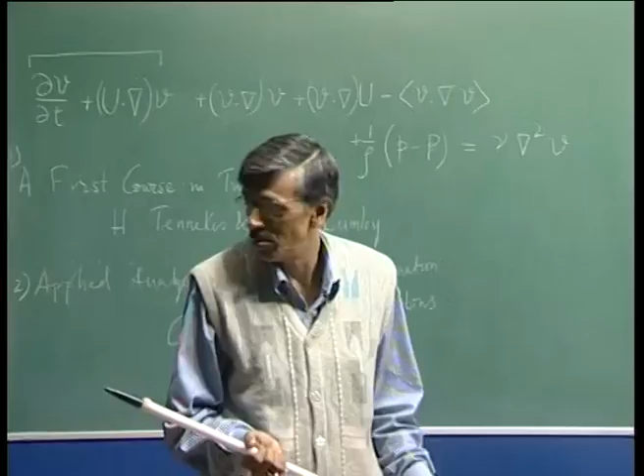So, once again let us review what we had done in the last class, looking at turbulent flows, which is an equilibrium, and what are the time scales involved in turbulent flows. We wanted to estimate by looking at this equation that we called the turbulence energy budget, which actually looks at the energy associated with the fluctuating component of the velocity.

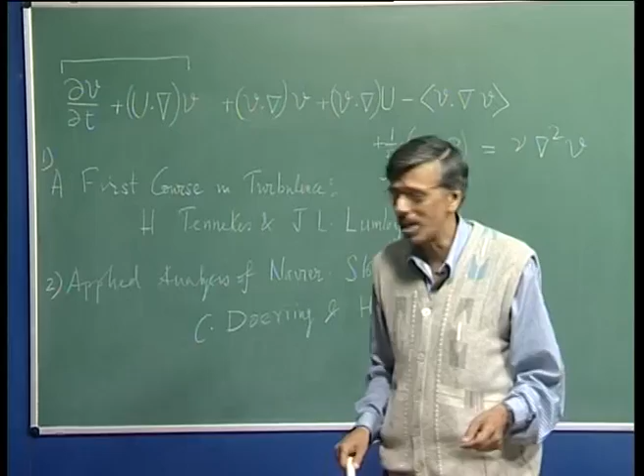What you notice is the assembly of this term that originated from this governing equation for the fluctuating quantity. As you can see, these two taken together, when multiplied by taking a dot product with V, gave us this term. That is what I have identified there. For example, this term comes from the viscous diffusion term here, right? That is what we get.

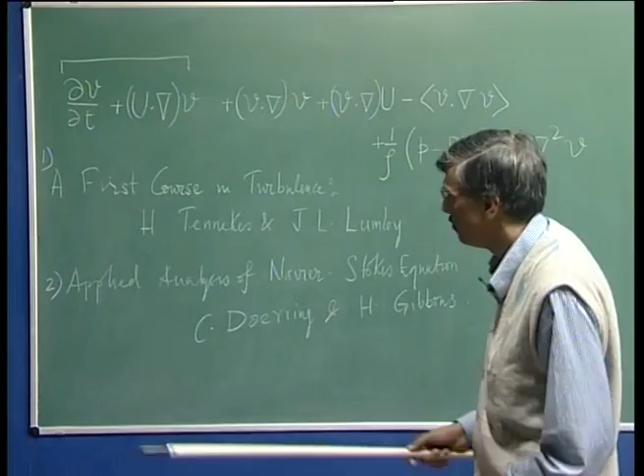And this term that comes from here, and there is this term that comes from a combination of this and that. This does not give rise to any contribution when you integrate over the whole volume, that we know.

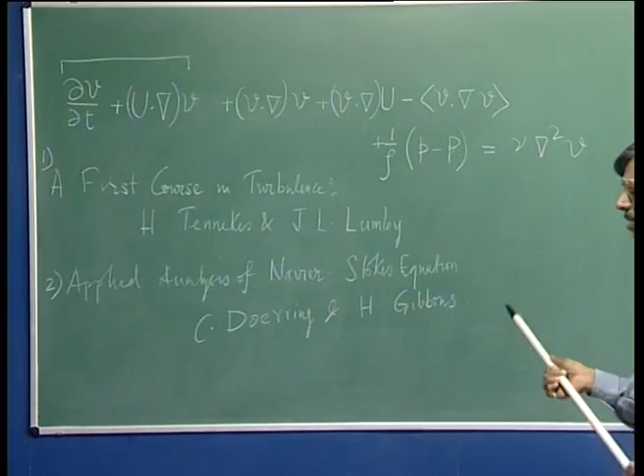So, then we decided to take a look at a special flow, which we called a steady homogeneous pure shear flow. Steadiness comes from if I put the left hand side time derivative equal to 0. Homogeneous will say that all quantities, average quantities, are independent of position. They are same everywhere except the mean flow, which convects the flow, right. That gives rise to the time rate also.

So, that is that, and pure shear flow will tell you that del u_i del x_j are pure constant. And if you do that, then you can see what remains.

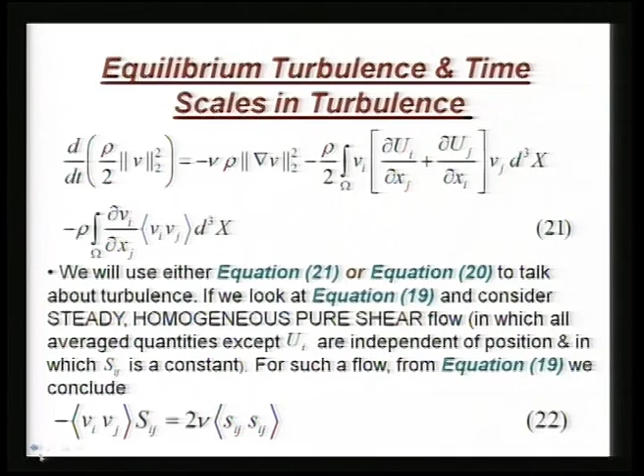This is the term that comes from the mean shear, and this comes from the fluctuating quantity. They ought to be balanced, right. So that is what we looked at, and we further made some order of magnitude estimate when we wrote that equilibrium condition. On the left hand side, we saw what was happening was basically the turbulence production term, and because it is in equilibrium, it must equal the rate of dissipation. So that is what we are getting.

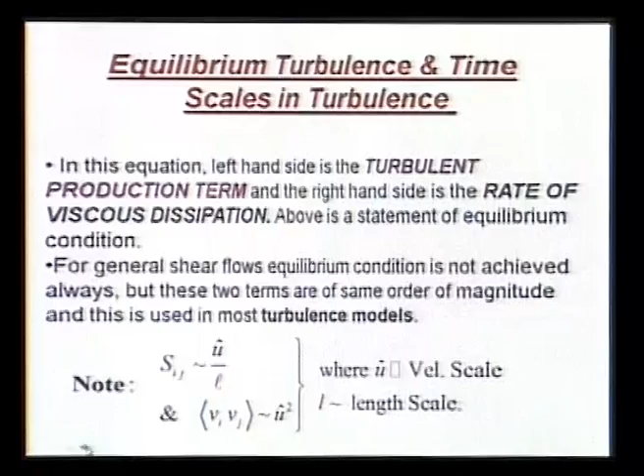Now, if we try to go beyond this specific case of equilibrium flow and look at general shear flow, then also what you would find is that these two quantities are of the same order of magnitude. They need not necessarily be exactly identical, and this observation is really the basis for developing most turbulence models.

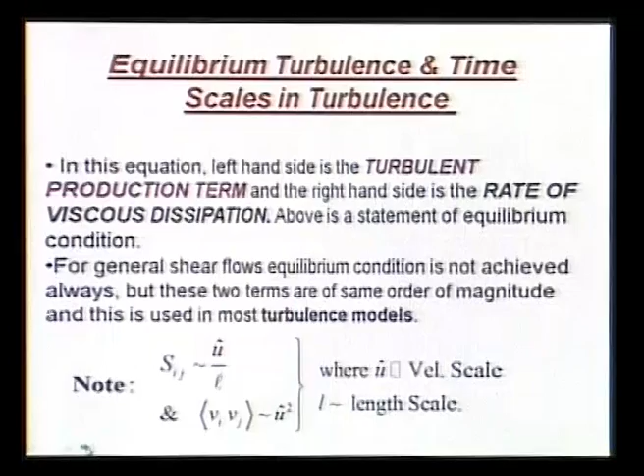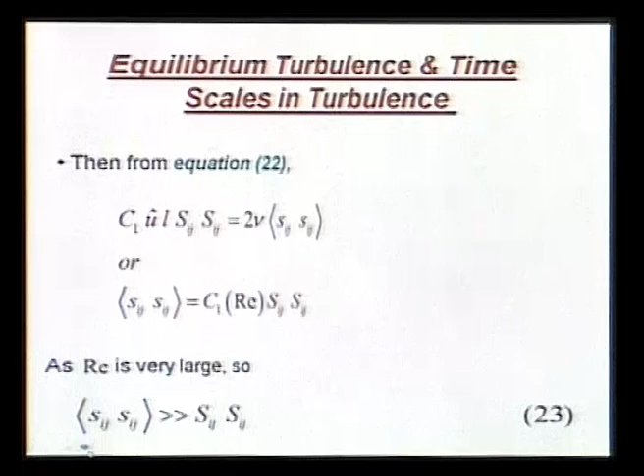And we have already noted that the Reynolds number is very large for turbulent flows. So that would show that on a time average sense, the fluctuating strain rate is significantly higher than the mean strain rate. We have seen the dimension of S_ij is of the order of 1 over t. So the time scale of dissipation and the time scale associated with the convecting process are widely separated.

This is the reason that one can perhaps do a Reynolds decomposition. This is for the same reason that we can talk about unsteady RANS, because even though the mean may vary slowly, the frequency of variation is so low compared to the frequency of the fluctuating component that we can say they are kind of separated, so that there is no direct interaction between time average strain rate of fluctuation and the mean flow, provided the Reynolds number is significantly large.

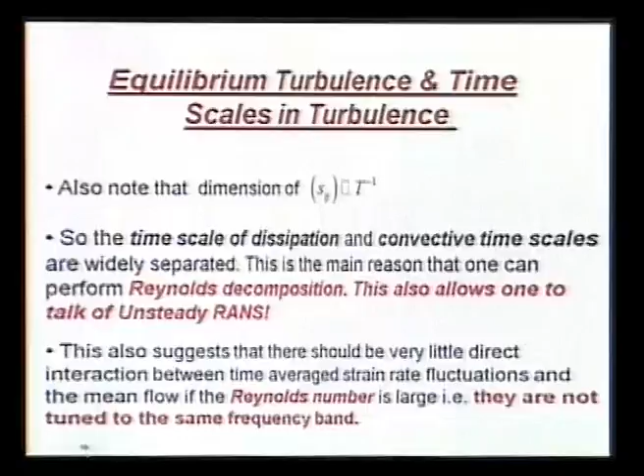So, in a sense, you can simply say in one sentence that these two events, the mean and fluctuations, are not tuned to the same frequency band. They belong to different frequency scales.

Now, if I look at a general shear flow, we see that the small scale turbulence is independent of the large scale. So when I am looking at, let's say, turbulent flow over an aircraft wing, the very fact that I put in an aircraft wing, the eddies created are of the size of the dimension of the aircraft wing, right, the chord. So you could basically look at that.

And then what you can see is that these small scale eddies do not change under rotation or reflection of the coordinate system.

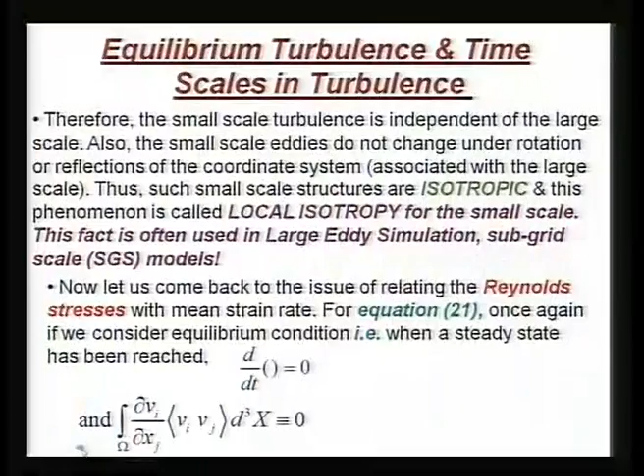So basically the small scale is independent of the large scale, and what happens is the small scales are therefore considered kind of isotropic, because you are getting the small scale by successive fracture of the large scale. You have large scale, they break down into smaller scale and so on. So when you go to the lowest scale, they become almost homogeneous isotropic.

This is what is called the local isotropy assumption of the small scale, and this observation is used in large eddy simulation, where you try to derive a model for the small scale which are not resolved because of your grid. So you will have to model it, making use of the fact that those scales are isotropic.

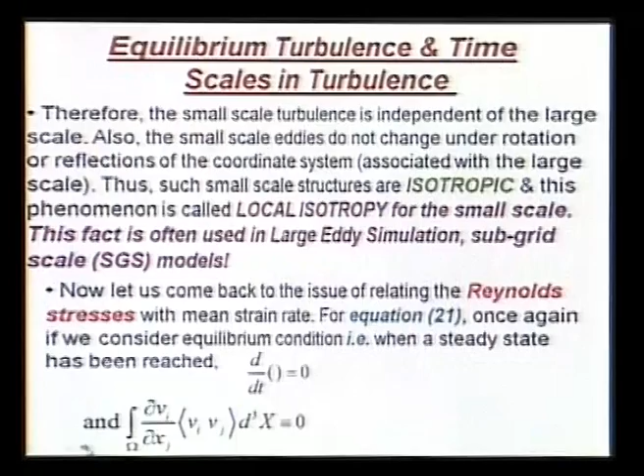So basically this is one byproduct of what we have studied looking at equilibrium turbulence. Now let us get back to this question of relating the mean stress, mean strain rate with the Reynolds stress. We find that we are again considering an equilibrium condition, talking about a steady state having been reached, and once we have reached that steady state, we get the following equation.

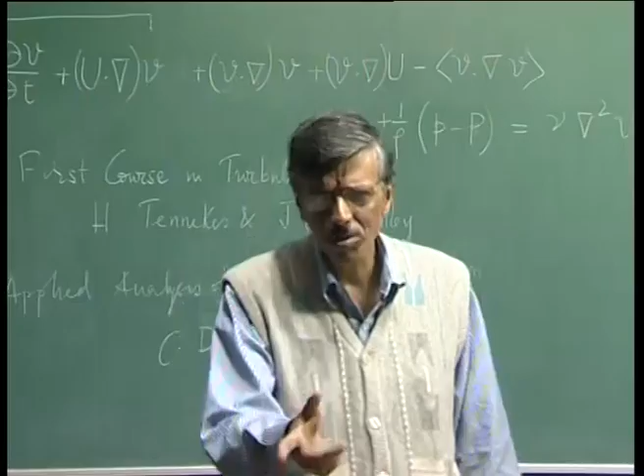So this is the observation we would like to note, that the Reynolds stress is related to the mean strain when you integrate over the whole domain, determined by the viscous diffusion term. The negative sign implies that the overall effect of V_i V_j integrated over the whole domain has to be of a similar effect like what you expect out of dissipation. So basically that is why most turbulence models are modeled simply as an overall dissipative phenomena. That is what the sign implies, that it is dissipation.

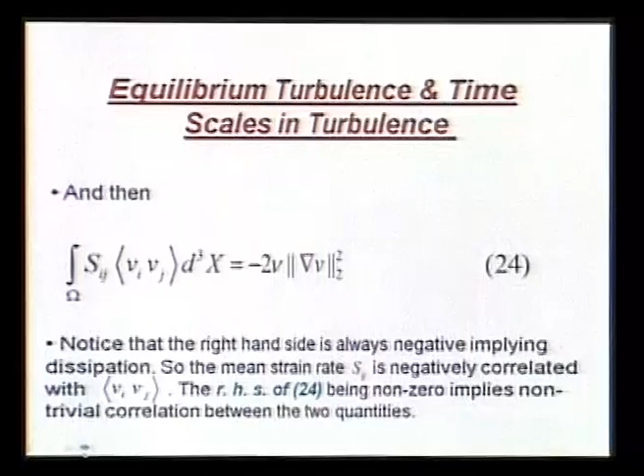It also shows that they are not completely uncorrelated. What we just talked about, the fluctuating strain rate is uncorrelated to the mean strain rate, but here we are talking about a different thing: the correlation between the mean strain rate and the Reynolds stress, which is the fluctuating velocity second moment.

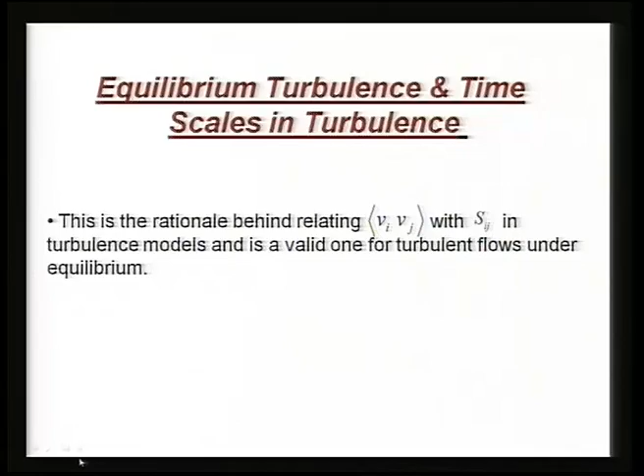This is also what is done in most algebraic or differential equation based turbulence models, where you eventually try to write out some kind of algebraic relation or differential equation which relates the evolution operator of this with the help of the mean strain rate. This is what you do in turbulence models.

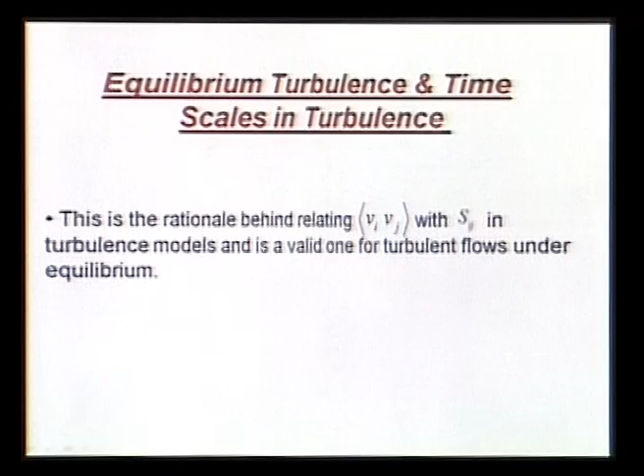Now take a simple example for demonstration purpose: flow inside this passage where the bottom wall is fixed, so you do not have any slip here. The top wall is simply slipping by at a constant speed, say u bar, while the other two components, y and z, are 0. So basically it is a turbulent Couette flow that we are looking at.

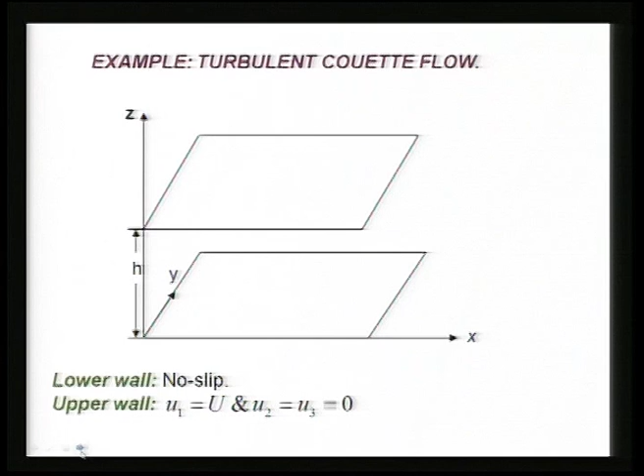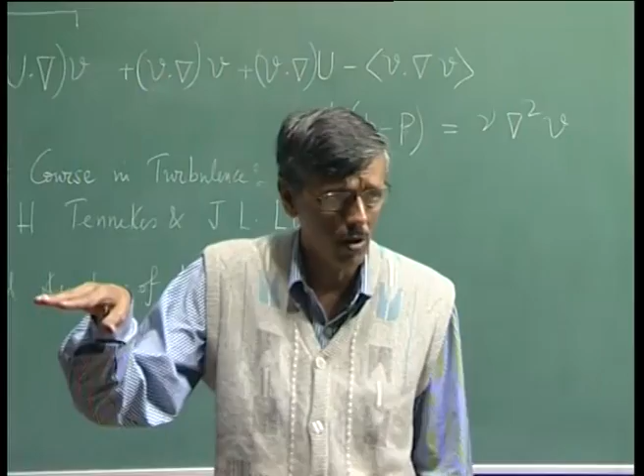Some of the parameters that define this flow are easy to see from the Navier-Stokes equation. The Reynolds number is given by the velocity scale, the speed at which the top wall is slipping by, and H, the gap between the two walls. This promotes an exact solution for the laminar flow, since it is a parallel flow, giving u equal to u bar times z by h.

Now if I want to solve for the turbulent flow, we need to apply these two boundary conditions, which are considered time independent even though the flow is turbulent. As a consequence, all the mean quantities are going to be functions of z alone, because we are talking about a parallel flow with perfect symmetry in the z direction, and no variance in x and y direction.

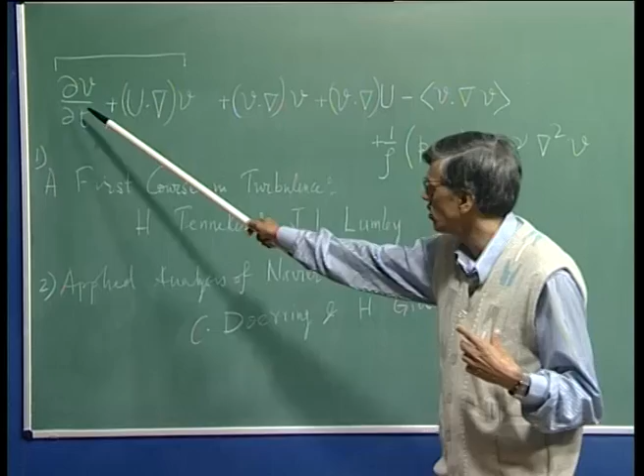Then if I write down this equation, I will get this term. You can verify that this term is of course not there, this term is gone, and this term will not be there either, because of the invariance with respect to x and y direction.

So what you end up getting from the RANS equation is this: the shear gradient of the Reynolds stress should be balanced equal to the streamwise diffusion term. So it is fairly simple. This equation is simple; all you need to do is integrate it once.

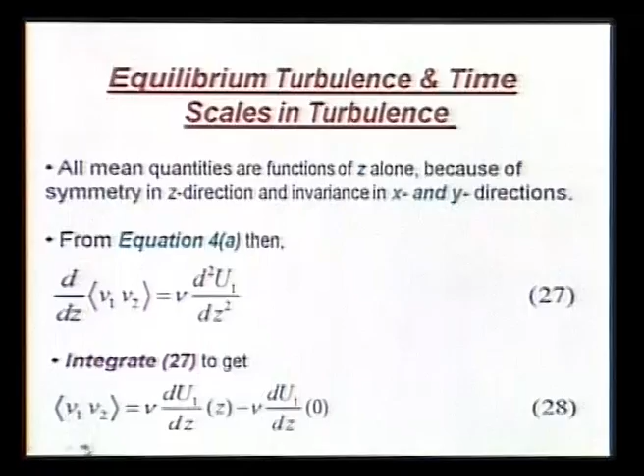So on the left hand side I will get V1 times V2 equals nu times du/dz, with 1 associated with the x direction, at the height z, minus nu of the same quantity evaluated at the wall. So we integrated it from 0 to a running height z.

So what happens is we have seen that our equation 24 was what? If you recall, equation 24 was Sij. We had written this, right.

This volume integral is equal to minus nu times this, right. So, that is the equation that we have. Of course, there is a factor of 2 missing here.

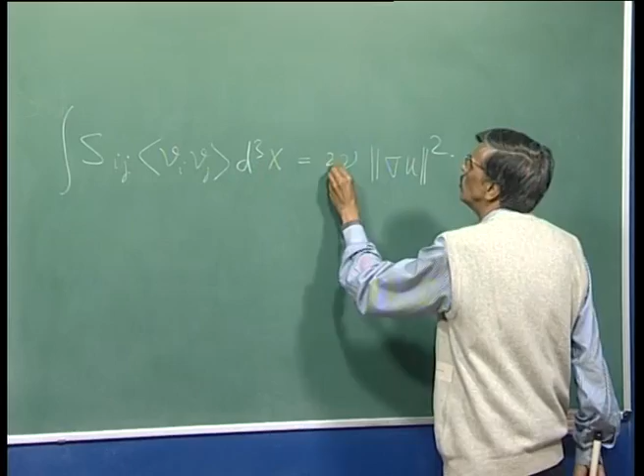So, what will be the simplest possible turbulence model? That should be given by this, because that is what our previous equation has shown. We just simply looked at it in this form, that 28 tells you that V1 V2 is going to be proportional to dU1/dz. So, if we try to do that, we can write it down in this particular fashion, then this will be equal to proportional to this.

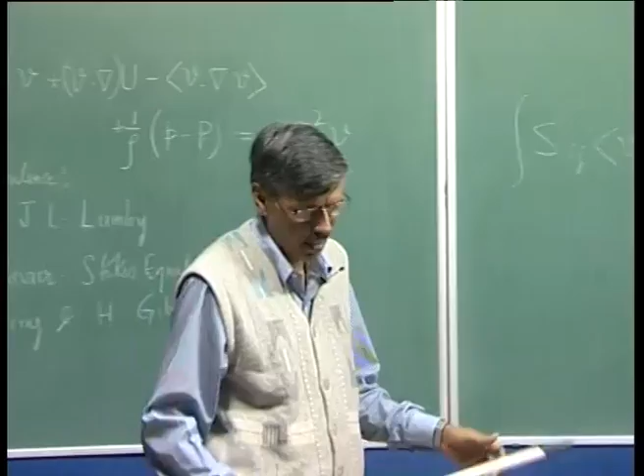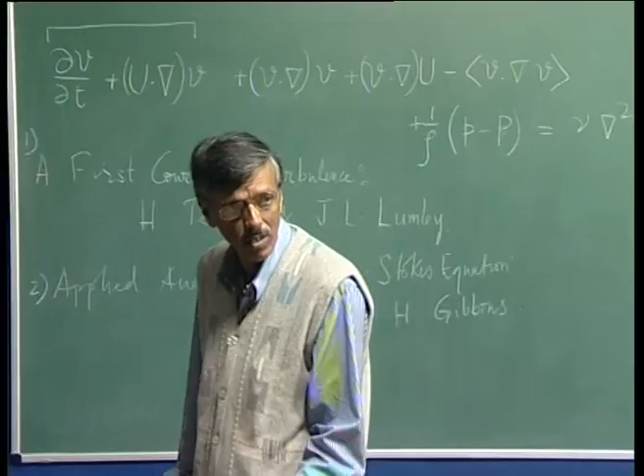So, proportionality constant is what we would like to call it as the eddy viscosity. And we have talked about enough to justify why we call it a viscosity, because we saw that Vi Vj negatively correlates and is proportional to the loss term. So, this also should mimic a loss term. So, that can come about if we position it as a sort of a viscous term.

Now, what is the dimension of eddy viscosity? It is area per unit time, right. So, that is L square T to the minus 1. What about the dimension of this? Dimension of this is 1 upon T, right. This du dz, so it is 1 upon T. So, then what happens is this must have this kind of a dependence, because if I want to have this dimension as L square T to the power minus 1, then that L square part comes from here, Z square, and T to the power minus 1 comes from this, and they are proportional.

So, this proportionality constant I am calling it as kappa square, and purposely wrote it as a square term, so that the nu T will be positive, whereas the Reynolds stress will be strictly negative. So, that is the motivation for writing down this expression for nu T, the kinematic eddy viscosity.

So, we have now seen that u prime provides the time scale, and z, the distance from the bottom static wall to any particular height, provides us the length scale. Kappa is a dimensionless quantity, and it has been shown time and again in various other studies that it is a constant, due to von Karman, taking a value of about 0.4.

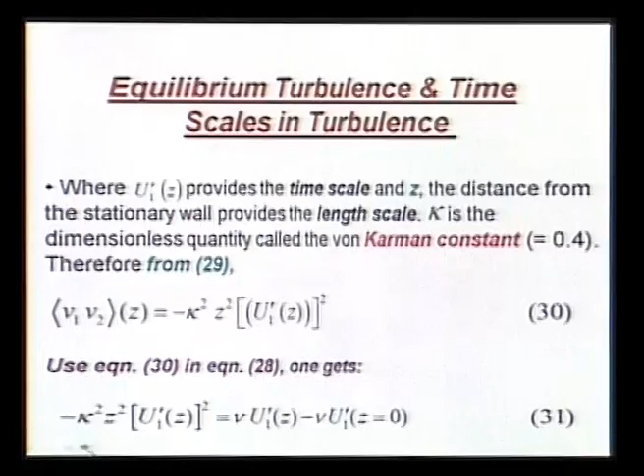So, this is the equation that would basically tell you how the shear is varying with Z, isn't it? That is what it is, du1 dz at different heights. So, it is a kind of a quadratic equation, so you can solve it. If you solve it, you will be able to obtain the expression for u1 z.

However, we can also define a velocity scale in a somewhat different way, where we talk about a wall shear that is dimensionally equal to rho times nu times du dz, right. So, that is the definition of this. So, since we are talking about a mean, that is why this angular bracket has come, and on the left hand side we have written everything in terms of mean quantity.

So, what happens is if I now divide, bring rho on this side, so tau w by rho gives you a velocity square length scale. So, this is what is called as a frictional velocity. U star is the frictional velocity, which is given in terms of square root of tau wall by rho. So, substitute that expression and you get this equation, that is the quadratic.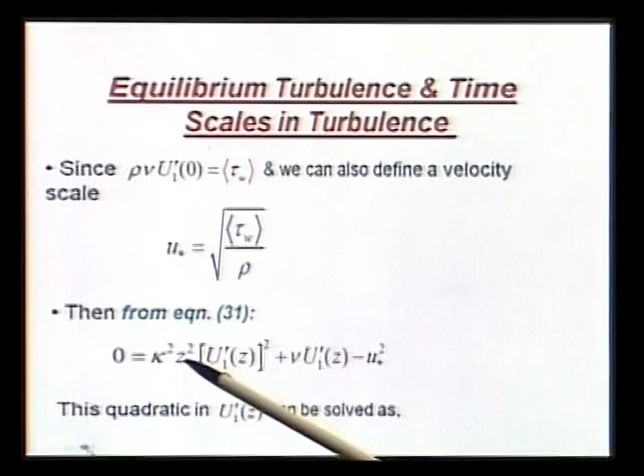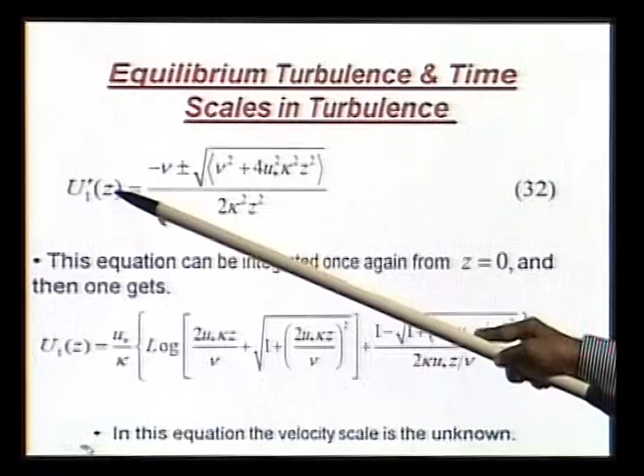Okay, so we have just introduced the friction velocity, and we have obtained a quadratic for u1 prime z, and that is your solution, straightforward. And so, this is an expression for du1 dz, right. So, we can integrate it once again to obtain the velocity as a solution.

So, whereas how is it that this is different from a laminar flow? Where has the thing come about? Well, it has come about because of the presence of V1 V2, right. V1 V2, those Reynolds stress would be negligible for laminar flow. So, where does this thing come in?

In this equation, that information comes in through the way we have defined the velocity scale u star, because the tau wall has a built-in effect of the turbulence in it. The wall shear itself has information of turbulence being built in there. So, once we can get this velocity scale, then we can get the solution for the velocity profile, right.

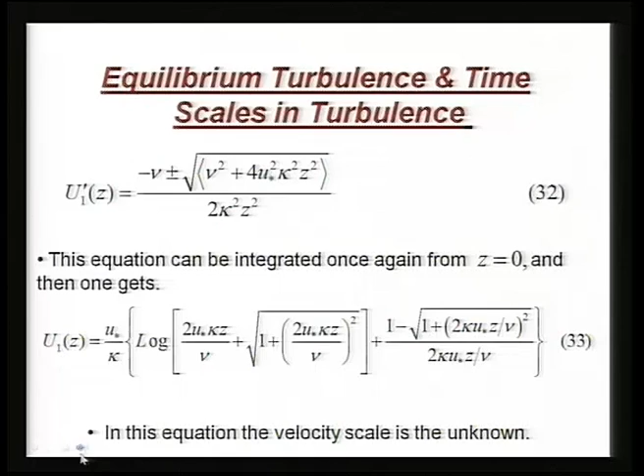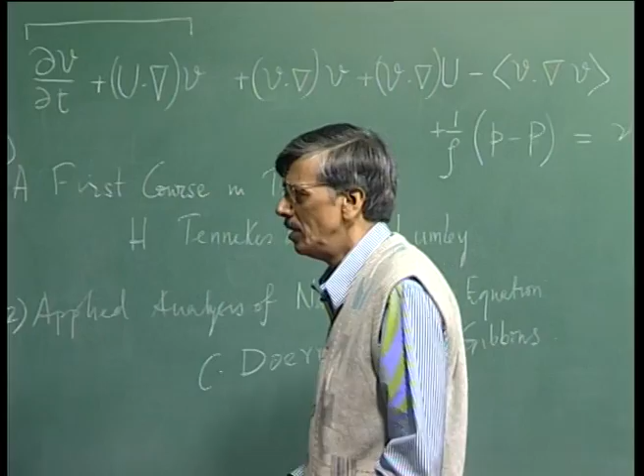So, what happens is if I choose a Reynolds number, I can solve this equation for u star, because everything else is known. Kappa is a constant and Re is known, u bar is known. Only thing that remains unknown here is this u star. So, I can use this equation for u star, the velocity scale. Once I have it, I can go back and obtain the velocity profile.

So, that is a very simple application of the ideas of relating the mean strain rate with the Reynolds stress. That is what it is.

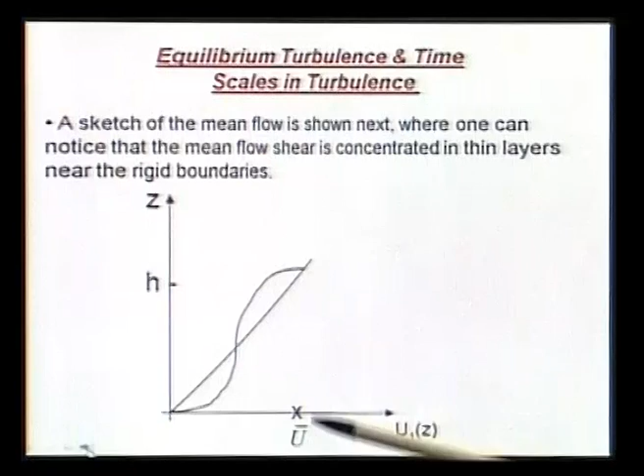So, if I now plot u1 versus z, this is the way this velocity profile is going to be. It is perfectly symmetric about the midpoint. On this side you have one sign of shear, on this side you have the other sign. So, the plate is dragged along like this. That is what you are getting. So, you get the maximum velocity u bar at z equal to h.

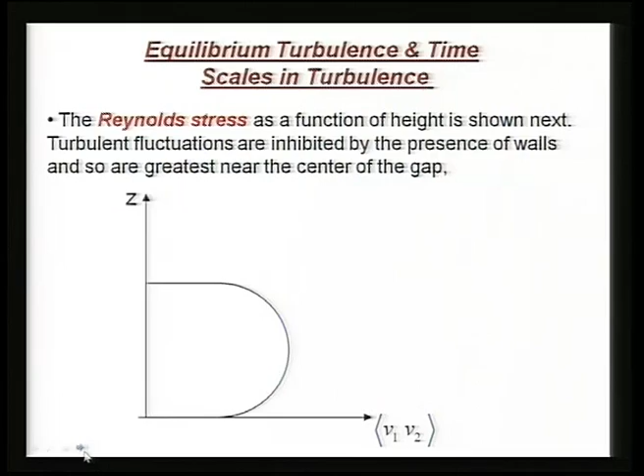So, this is your mean flow solution, what we called u1 as a function of z, and having obtained that, we can also calculate the Reynolds stress v1 v2 as a function of z, which will be equal to 0 at the wall, because at the wall you are going to apply the no slip condition. So, no fluctuation, and its time average also has to be 0.

Where will it be maximum? It will be maximum somewhere in the center of the passage. So, that is what we are going to see, that at the center of the gap we are going to get the maximum Reynolds stress.

Well, this is just kind of an exercise. You can spend some time looking at what happens to this value of the frictional velocity in the limit Re going to infinity. That is truly a very high Reynolds number solution. You should be able to show that the frictional velocity has this kind of a log dependence on Re. This is at kappa, okay, this is at kappa.

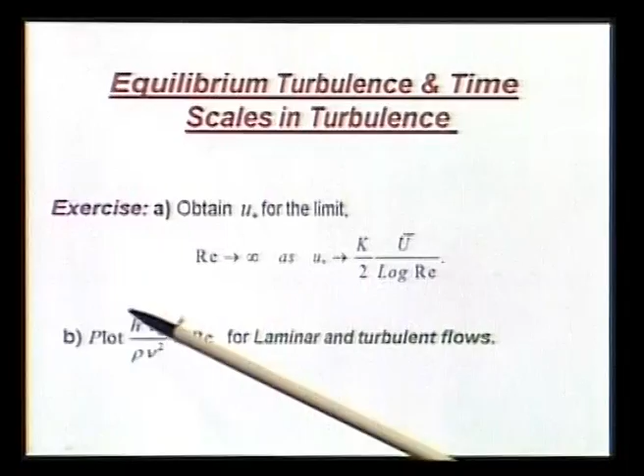What you could do is you have a laminar flow solution, you have also a turbulent flow solution. So, from those velocity profiles you can calculate tau w, and then try to plot this quantity versus Re, and then you see what you are going to get. Do take a look at this, and you will be able to see very clearly the distinction between laminar and turbulent flows.

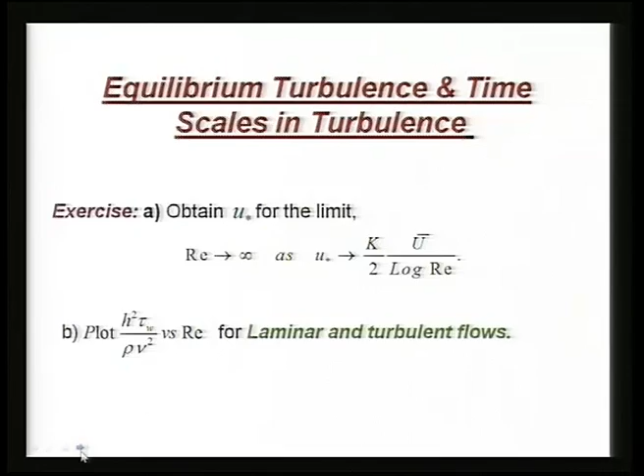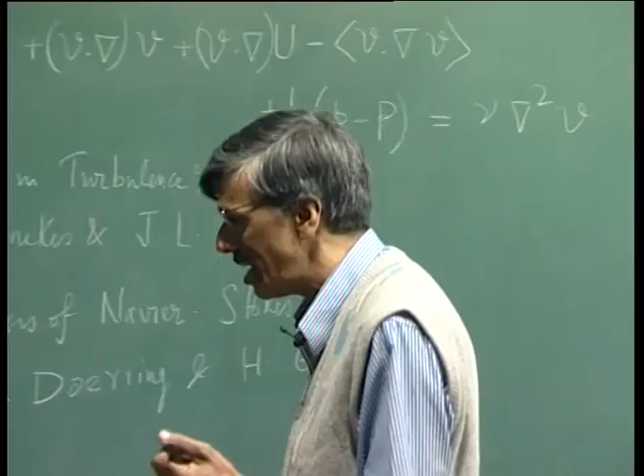Okay, let us now move on to a different approach. So far what we have done, we have looked at turbulence as a kind of a time varying quantity, and we looked at it in terms of its time averaged equation, the RANS equation. We have also talked a little bit about large eddy simulation, but not to a great extent. Talking about time averaged quantities, we have made observations like the role of Reynolds stress is going to be dissipative in a time average sense.

But is it true that it happens at all length scales? We are talking about a time averaged value. So, what we would rather like to know is how the turbulence quantities vary as a function of wave number.

And this was what was studied in great detail by Kolmogorov, by looking at a periodic flow in a box of size L. Okay, so I have a cube of size L.

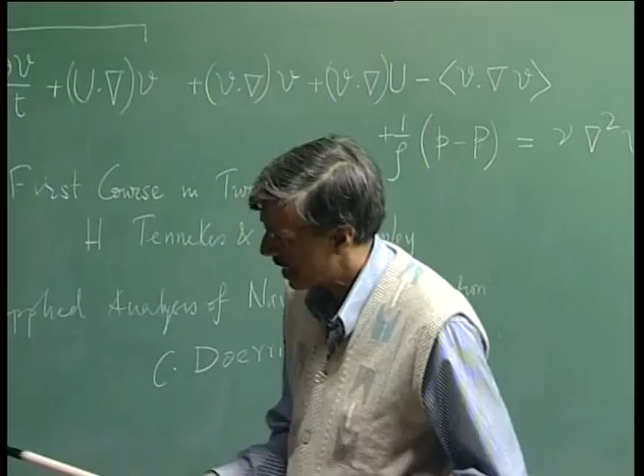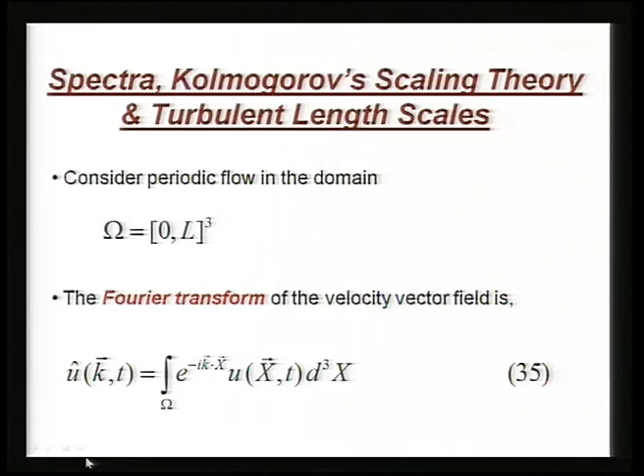And I am also going to look at a velocity vector, which I am writing as u as a function of x and t. I can take its Fourier transform to get the spectrum. So, u hat as a function of wave number k, and of course k is a vector, so you could have all three components.

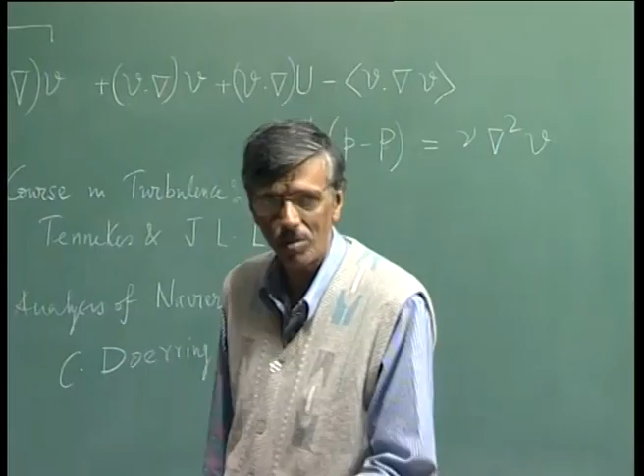Now, I could get the spectrum, or if I have the spectrum, I could perform an inverse transform to get the velocity field in the physical plane. This is what we are doing with the idea of looking at a box of size L, and we are also making an assumption of the flow being perfectly periodic. So, what happens is you are going to get a succession of wave numbers in these three directions, which are super harmonics of the fundamental, and the fundamental is given by 2 pi by L.

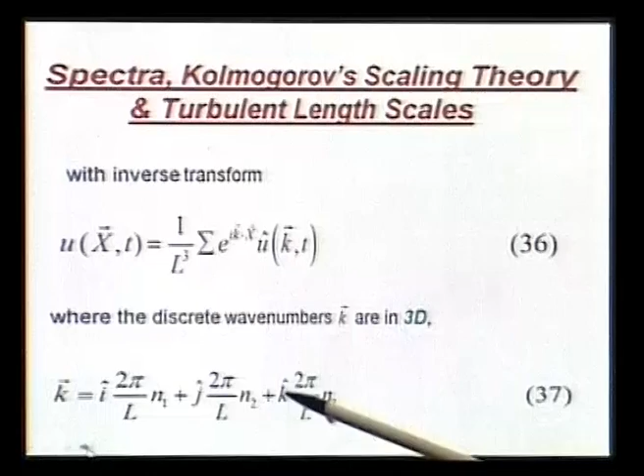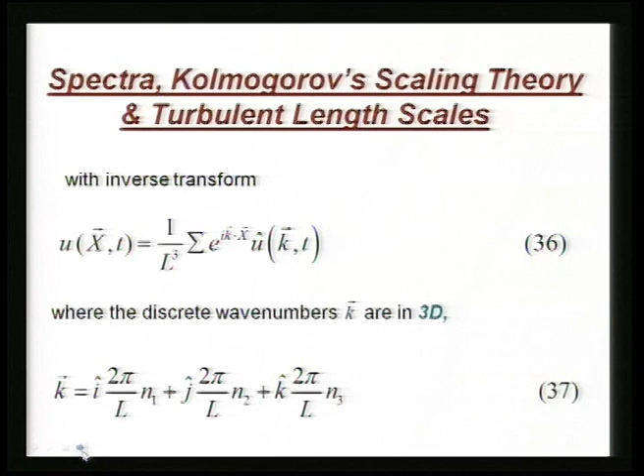So, I have it in the i direction, I have it in the j direction, I have it in the k direction - x, y, z directions - and subsequent harmonics will take different values of n1, n2 and n3. So, it is a periodic flow. n1 could go from minus infinity to plus infinity, and so can be said about n2 and n3 also. That is what we are looking at.

Once we have defined the velocity field either in the physical plane or in the transform plane, we can invoke what is called Parseval's equality or identity, which is a very simple observation: if I look at the kinetic energy per unit volume in the physical plane, that is half rho times modulus of u as a function of x and t squared. That is exactly the same thing if I would have written down the velocity in the spectral plane. So whether I look at it in the physical plane or the spectral plane, the kinetic energy represented would be the same.

Now, if I consider a non-periodic flow with arbitrary conditions, then this summation would be replaced by an integral. I will have to replace Fourier series by Fourier transform. And what happens to the box size? The box size is becoming infinite, to the extent that we will take L going to infinity and replace the summation by the appropriate integral.

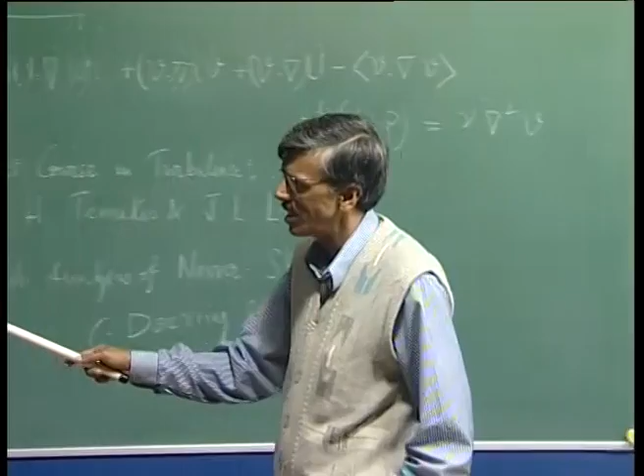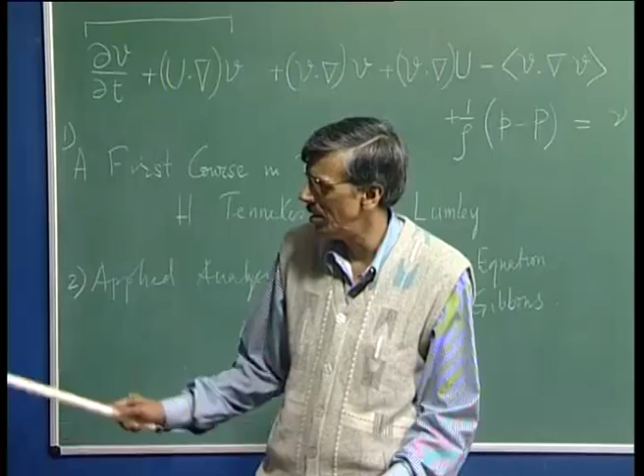Now what you do is the appropriate integral implies talking about an elementary volume in k space, which I write as d cube k. What were the individual fundamental frequencies? Those were 2 pi by L, so in each direction I have 2 pi by L as the interval. So d cube k is nothing but 2 pi by L whole cube. Then for arbitrary flow I can write Parseval's equality in this form: we have replaced the summation by an integral, and written L cube as 2 pi whole cube by d cube k.

So this quantity, the kinetic energy per unit volume, is called the kinetic energy density. This is of course a scalar quantity. I am going to do the integral over all possible k's, so it is in three dimensional k space. So what I could do is I could do it in a slightly different way.

For example, if I have these three directions, I could write it in, let us say, a Cartesian frame. I could also write it in a spherical polar system. So if I do it in a spherical polar system, then what happens?

I am going to talk about the radius vector, which I could call k bar, and an elementary volume in the spherical polar system would be a sort of spherical shell of width, I will call it dk. What happens to the elementary volume in this case? There we are talking about three variables in the x, y and z direction. Here also we are doing the same thing with k bar, and then we will talk about this angle theta and this angle phi.

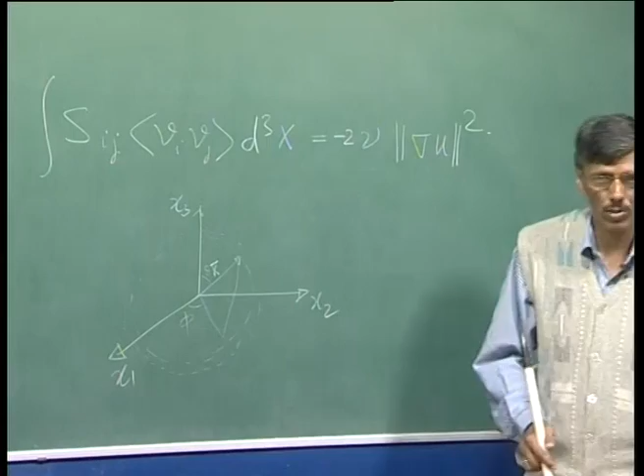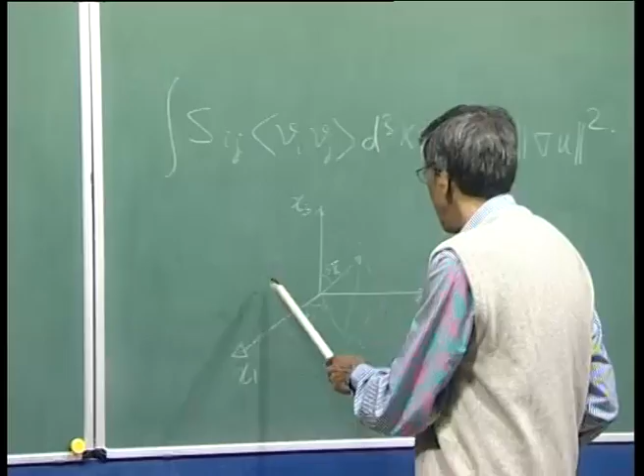However, let us say we perform the integral in the theta and phi direction, then it becomes a one dimensional quantity. So basically, looking at a spherical shell like this, we have performed all possible variation in theta and phi. That is how we are getting this spherical shell. And what is the volume of that shell? The surface area is 4 pi k bar square, and the width is dk.

So that is what you are seeing: if you migrate from a Cartesian frame to a spherical polar system, then this elementary volume you could write in terms of a single quantity. And what is k bar actually? K bar is the modulus of the wave number vector, because you can take k bar and project it into three components along the x, y and z directions. So basically it is another way of looking at the quantities in a spherical polar system.

And then, for the total kinetic energy that we have gotten, what we are going to do is integrate over the remaining unknown independent variable, k bar. So I will integrate that over all possible k bar, and I will get the total energy. So if I write it like this, and if you have seen that previous expression I had written for E of k, that involved d cube k, remember?

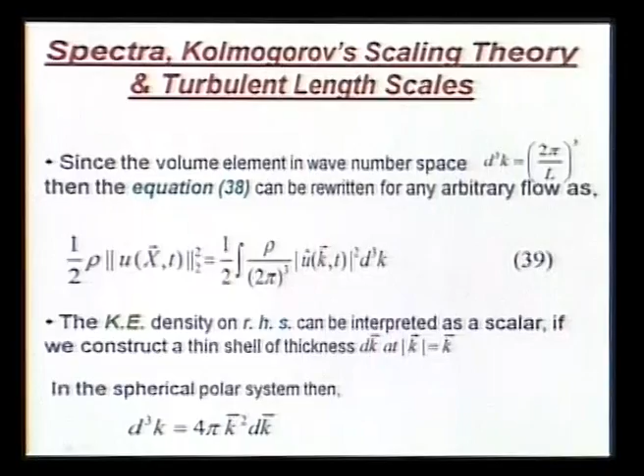If I substitute it here, I will get this quantity times 4 pi k squared, that should be my E of k bar, because I have to simply perform that k integral. So that is what we are going to get. From each length scale I can identify the corresponding k bar, and get the corresponding contribution to the energy spectrum.

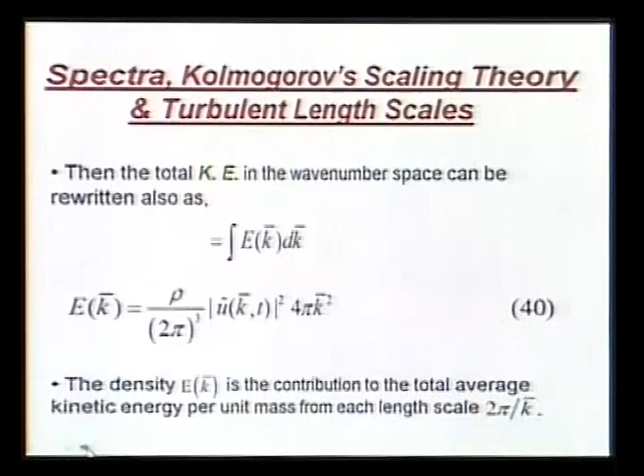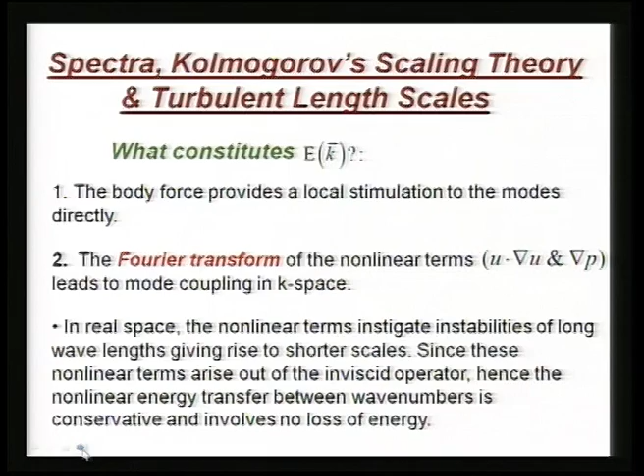Now you may like to know what constitutes this E of k bar. Going back to our original equation, not this one, but the original equation which also included the body force, the body force can directly stimulate a particular length scale at whatever scale that is happening.

This is what we are going to study now, and we are going to show what the nonlinear terms do. The nonlinear terms actually provide a kind of coupling among different modes in k space.

In the real space, when I look at the nonlinear term, what do they do? They are responsible for all kinds of instabilities, as we have studied. Instabilities of long wavelengths, which also gives rise, via the dispersion relation, and also nonlinearity, to smaller scales.

Since these nonlinear terms arise out of the inviscid operator, the convective acceleration term, what happens is this nonlinear energy transfer that takes place between two wave numbers is going to be conservative, because it is an inviscid mechanism with no losses involved.

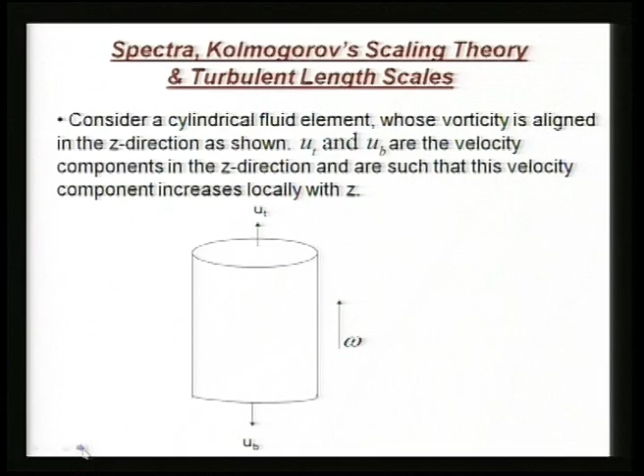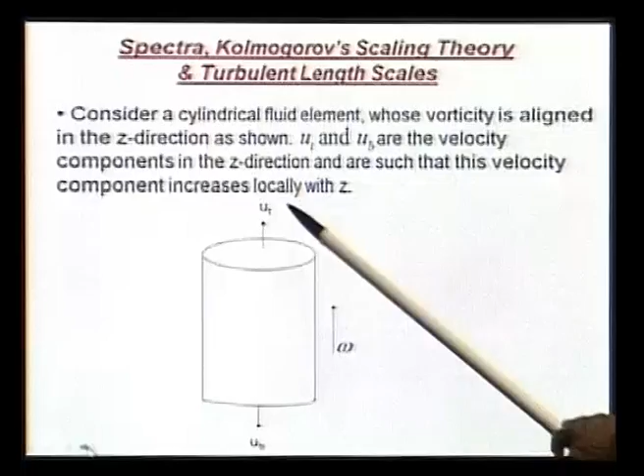Now, think of a cylindrical fluid element whose vorticity, let us say, is aligned in the z direction, as shown. Let us say the top of the element has a velocity u_t and the bottom has a velocity u_b. So what this is doing is elongating the fluid element. If I take the velocity as a linear function of z, meaning as z increases, u also increases, then it is going to be stretched in the z direction.

So this is what we want to see, and we call it vortex stretching. We are talking about a situation where we are increasing the velocity in the z direction. So what does this do? This is now going to be a positive quantity, and as a consequence, the fluid element will be stretched.

If the fluid element is stretched, and we are talking about inviscid dynamics, so there are no losses, everything has to be conserved, including the angular momentum. What is angular momentum? I times omega, that is, angular momentum is proportional to moment of inertia times the angular velocity.

Now, what will happen if I take an element and stretch it in the z direction? I comes down. If I comes down, what happens? Omega has to increase, because this is conserved anyway. So what we are saying is...

If I have a velocity field which causes the fluid element to stretch, that also causes the vorticity in that direction to increase, intensify. So this is one mechanism by which vorticity increases, and it can increase if this term is positive, it can decrease if this term is negative. But...

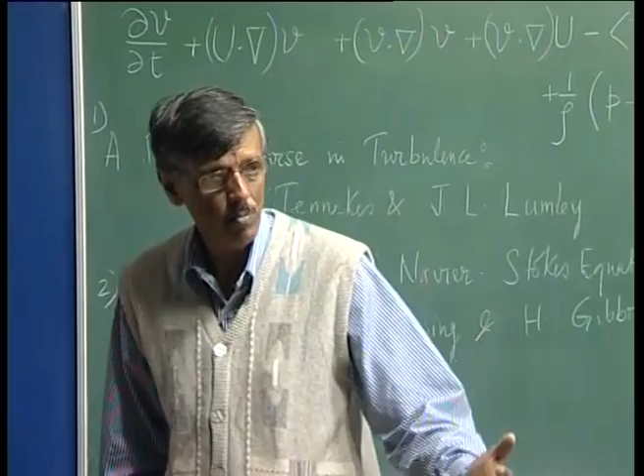Irrespective of whether it is increasing or decreasing, if I look at the Enstrophy term, what will happen? It will always increase. That is why we purposely introduced that quantity, which is nothing but the mean square term. So whether the element is stretched or compressed, Enstrophy is going to increase, and that will tell you what is the rotationality of the system.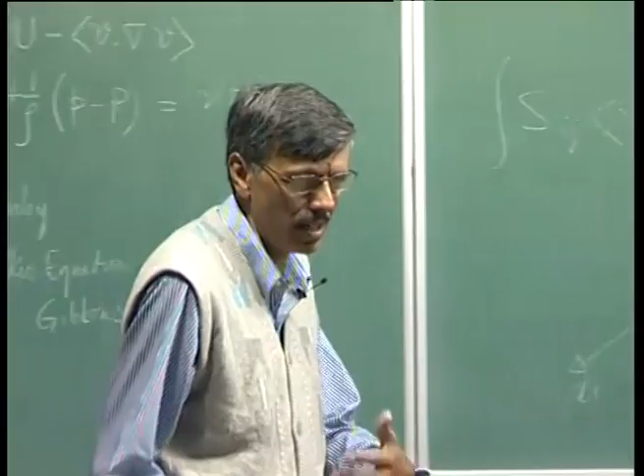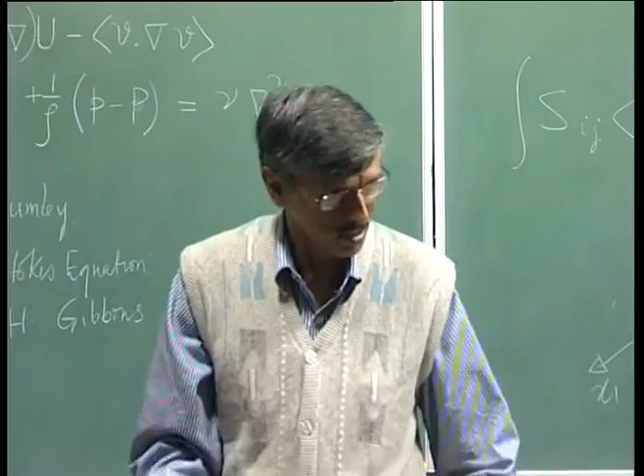Now, it is very clear here that this vortex stretching term does not increase or decrease the total angular velocity because of conservation. We are looking at one direction increasing. What happens to the other direction? Because totally we are again looking at inviscid mechanism, I omega has to remain conserved. So if I is all pervading, that is not changing, then omega also will not change.

So that is exactly what we are saying here: it does not increase or decrease the total angular velocity, but it simply acts like a local amplifier or attenuator of the vorticity field.

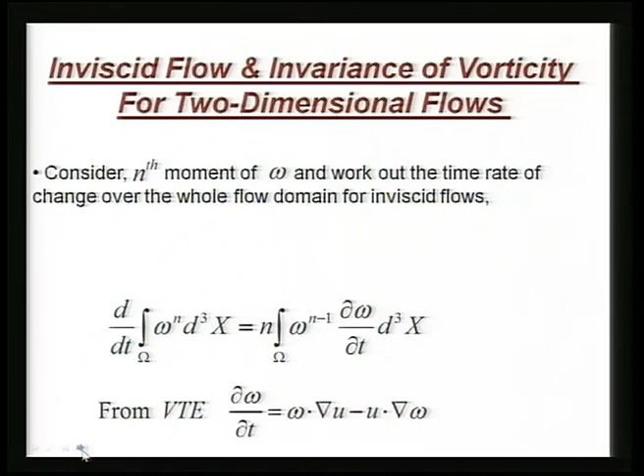Let us generalize this result by looking at the nth moment of the vorticity field. So what I am trying to do is take omega raised to the power n, integrate it over the whole domain, and find out its time rate of change. If I do that, I can bring it inside, then I get n times omega to the power n minus 1, del omega del t, integrated over the volume, and this we have already obtained from the inviscid vorticity transport equation.

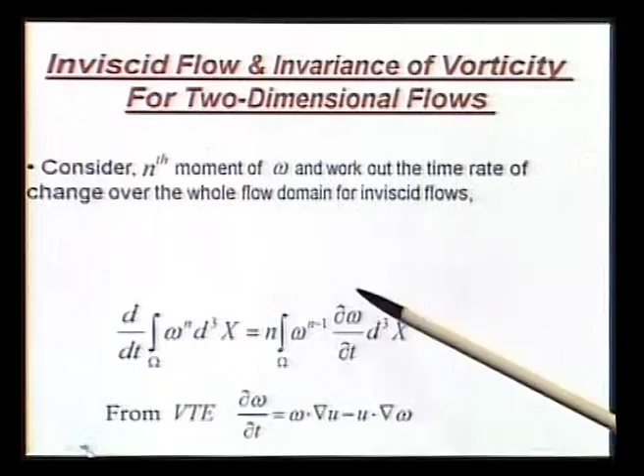So this plus this is the convective term, this is the vortex stretching term. I can replace this del omega del t by these two terms. Now if I do that, what do I get? Well, I get these two sets of terms.

Now this is easy. The second term is easy because this is going to give n times omega to the power n dot grad u. Now this part I have written in this form. If you open this, then you will get omega to the power n, and then del dot u term, but del dot u is 0. So that is why this term has been written in this form.

So again we note that this term is coming from the stretching term. So this stretching term is missing for 2D flows, and what happens to this?

I am going to perform this volume integral. So I can use the divergence theorem and write it in terms of a surface integral, Gauss divergence theorem. So basically what I have done is I have taken the quantity, found out its normal component on the domain boundary, delta omega, and done a surface integral.

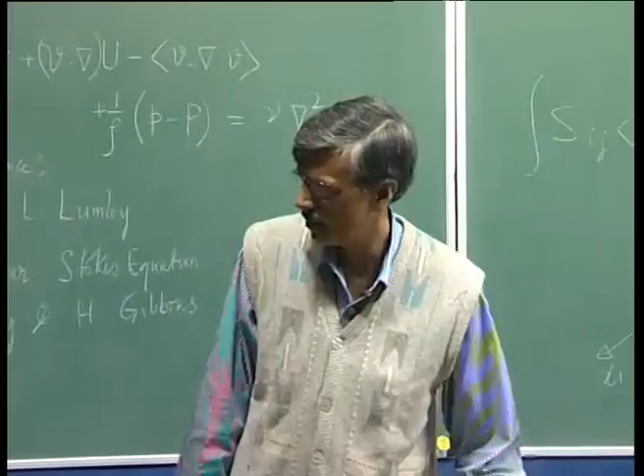So what will happen is this first term will be most of the time equal to 0, and please do understand, we are talking here about inviscid dynamics. So we are not even talking about creating omega at the wall. Even if I talk about creating omega at the wall, I will have to correspondingly talk about no slip condition. But if I talk about inviscid dynamics, then u will be non-zero at the wall, but omega is not getting created. So basically, the first term is 0 because of the boundary condition.

If we are talking about two dimensional flows, then instead of doing a volume integral, I will be doing a surface integral, and then this term will be a surface integral. I can use Stokes theorem and convert it into a line integral. So the analogy is very simple: either I use Gauss divergence theorem or Stokes theorem.

In either case, I find that the first term will go to 0, and for the 2D flow, the second term also is additionally 0. So what this basically says is that in 2D flow, any order moment that you look at for the whole flow field does not change with time.

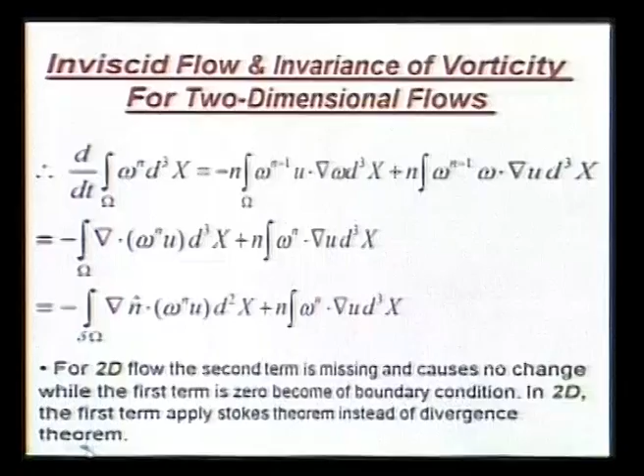For 3D flow, what happens is only the thing that comes about from this stretching term. So this nth moment increases due to this vortex stretching term for 3D flows.

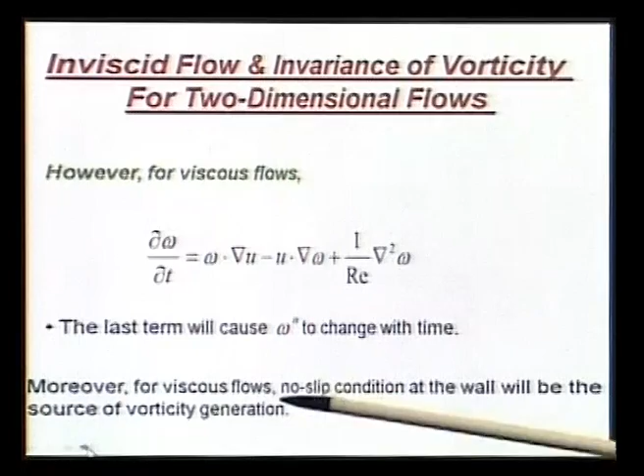To extend it to viscous flows, we would have to replace del omega del t by not only these two terms, but also the viscous diffusion term. This term also will cause omega to the power n to change with time, so that will be an additional source of change. Moreover, for viscous flow, the no slip condition at the wall will be the source of major vorticity production. So this is what we need to understand.

Now look at some additional properties of Enstrophy. This is the way Enstrophy is defined, using tensorial notation. So we have this permutation symbol here, epsilon i j k times del u k del x j.

What does it mean actually? We are looking at omega i, right, so this is your omega i, because you are integrating over j and k. What is left is basically the omega i part. The same thing here—what is this? This is going to be omega j.

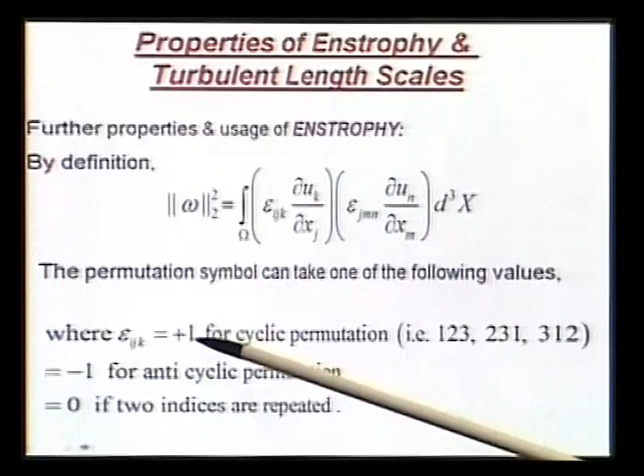The property of this permutation symbol is the following: if I take a cyclic permutation, a natural cycle, like i equal to 1, j equal to 2, k equal to 3, or i equal to 2, j equal to 3, k equal to 1—going in a circle—then the permutation symbol takes a value of plus 1. If I interchange any two of these, say instead of 1,2,3 I take 1,3,2, then that becomes minus 1. And if two indices are identical, then this quantity is 0. That is the meaning of the permutation symbol.

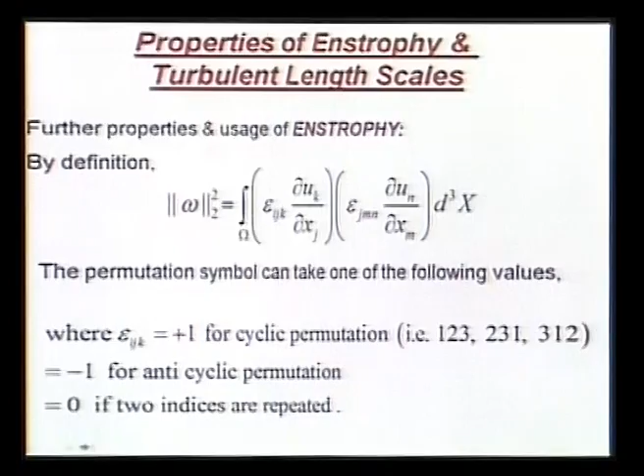So if you adopt this way of looking at Enstrophy, you can also write it down in terms of this. Once again you can notice these are two products of the Kronecker delta, and you can clearly see that this multiplied by this will be non-zero when j equals m and k equals n. That is what I have done here.

So here I have changed n to k, and here j equal to... well, this del x m has become del x j. So that is that path, and this path will give you this result.

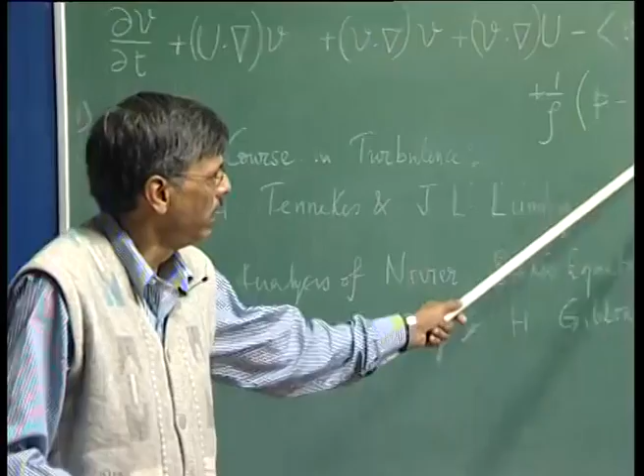Now this is nothing but this quantity, isn't it? Recall that quite often we were writing the contribution coming from this as nu times modulus of grad u squared—that is because of this term.

What about this term? This term is going to be 0 if I am looking at a periodic problem, or if I am looking at the boundary contributions—no slip boundary will ensure that.

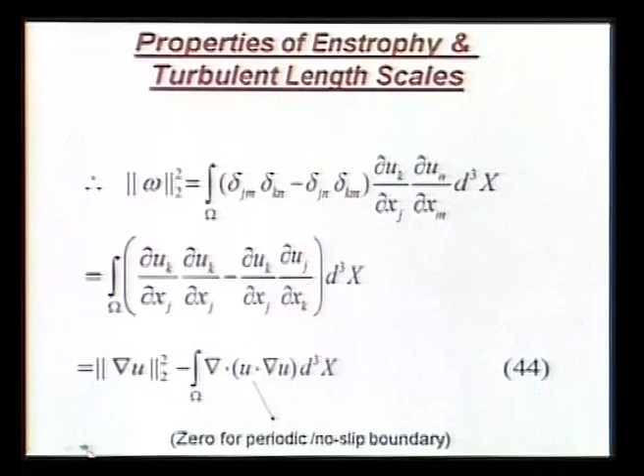So basically what we are essentially talking about is that the Enstrophy is also related to the gradient of the velocity field by this expression.

We can use this expression in the energy equation for the total velocity field. Again we start from the equation we already wrote for the Navier-Stokes equation, including the body force term. Now, the equation we wrote in the previous step—I will take a dot product of this equation with the velocity field, multiply it by ui, and integrate over the whole domain, and this will give us this equation.

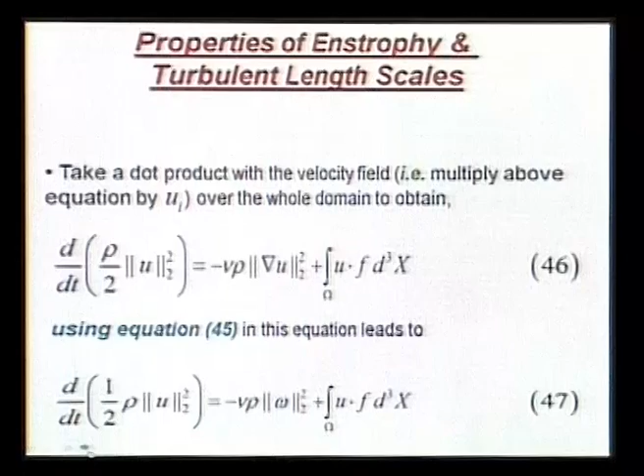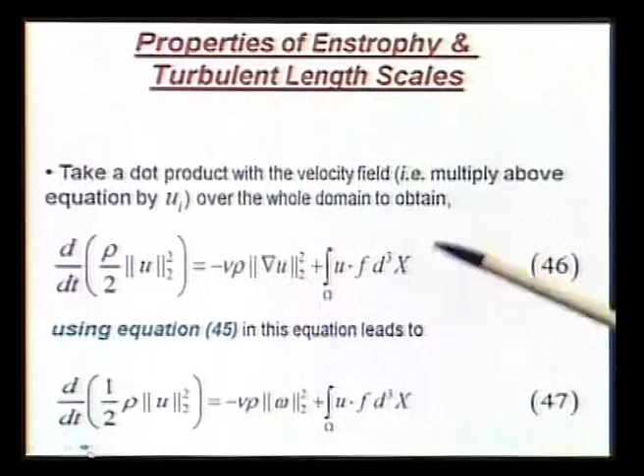I think I will stop here today, and in the next class we will wrap this up and see how properties of Enstrophy can help us understand what kind of additional length scales are involved in this problem. Okay, I will stop here.